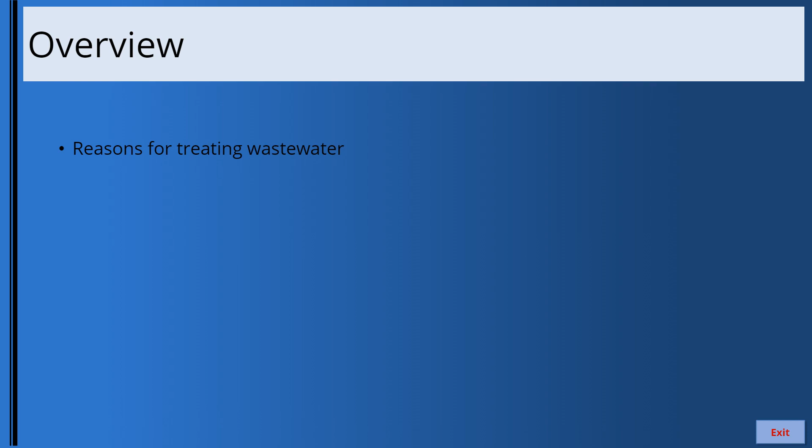So, as part of the introduction to wastewater treatment, I'm going to cover the reasons for treating wastewater, the NPDES program, which regulates wastewater treatment, and finally, it will include a discussion on the individual elements of wastewater management.

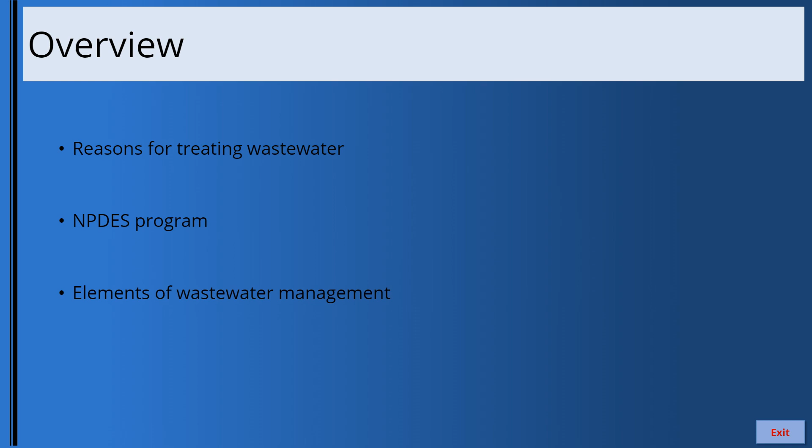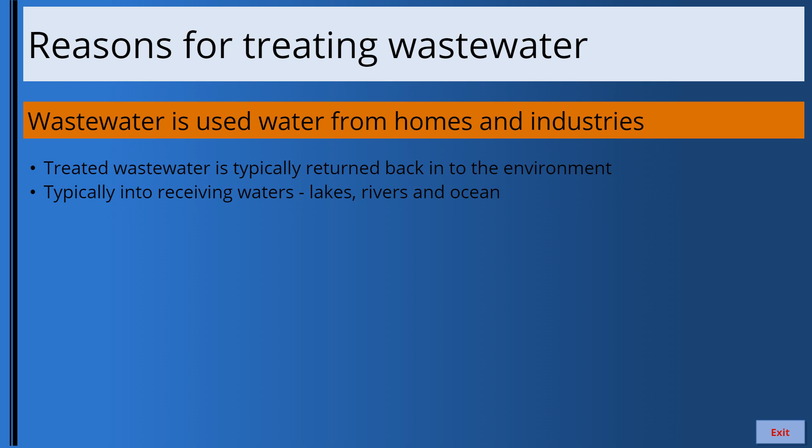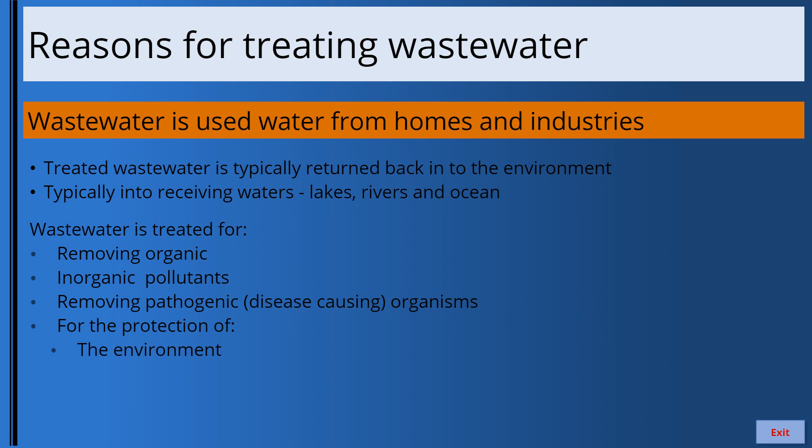So, now let's look at the reasons for treating wastewater. Wastewater is essentially used water from homes and industries. Typically, the wastewater is treated and returned back into the environment, into receiving waters such as lakes, rivers, and oceans. Primarily, wastewater is treated for removing organic pollutants, the inorganic pollutants, which include nutrients for plant growth such as nitrogen and phosphorus, and for removing pathogens, which are the disease-causing organisms. So, primarily, wastewater treatment is for the protection of the environment and human health.

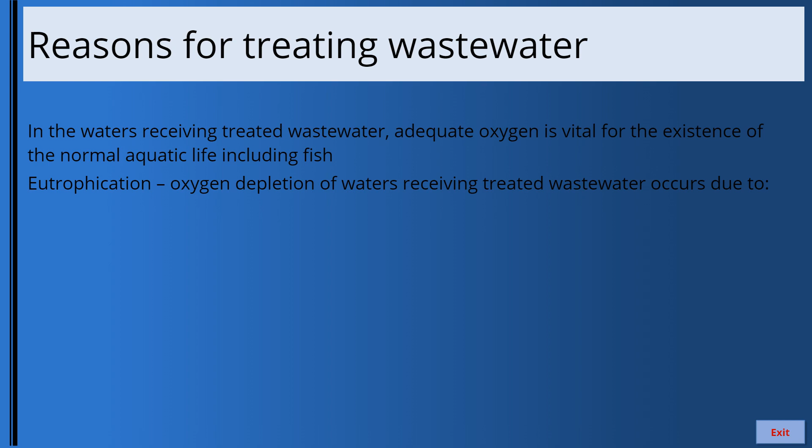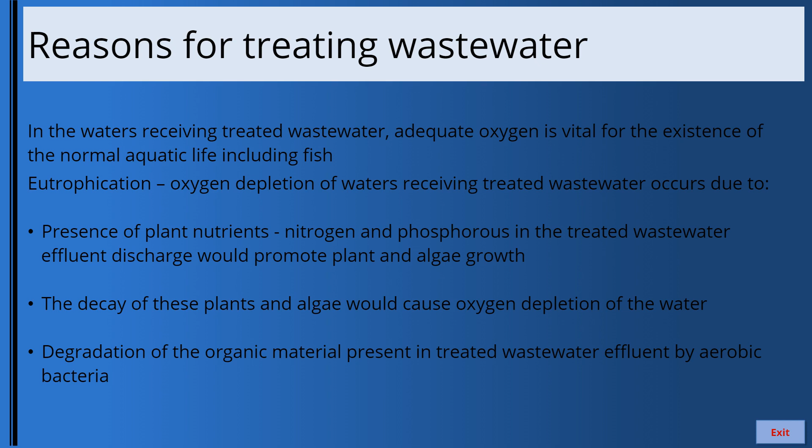So, in the receiving waters where the treated wastewater is discharged, adequate oxygen needs to be present and maintained to ensure the existence of its normal aquatic life, including fish. And if the wastewater discharged into that water body is not adequately treated, eutrophication, which is the oxygen depletion of the receiving waters, may occur, because plant nutrients, which include nitrogen and phosphorus, if present in the treated wastewater, would promote plant and algae growth. The decay of these plants and algae would cause the oxygen depletion. Additionally, if any residual organic material is present in the treated wastewater, it would be consumed by aerobic bacteria, resulting in the consumption of dissolved oxygen.

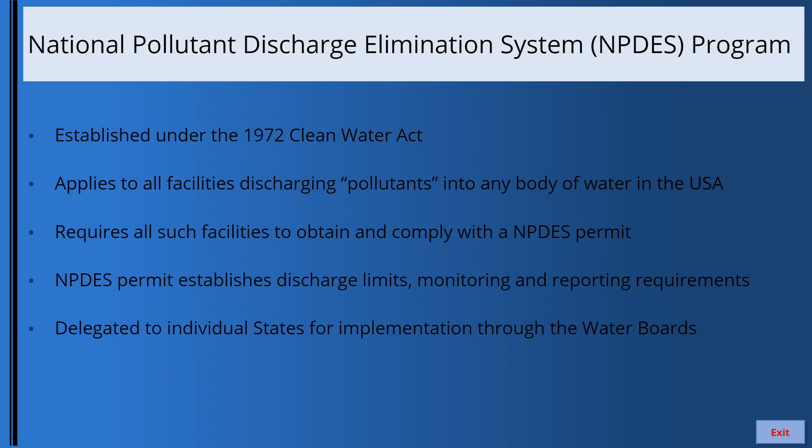The NPDES program, which is the National Pollutant Discharge Elimination System program, is the federal regulation which regulates wastewater treatment operations. NPDES was established under the 1972 Clean Water Act, and it applies to all sources that discharge pollutants into the waters of the United States. Primarily, the NPDES requires all facilities that discharge pollutants into any body of water to obtain and comply with the NPDES permit. And the NPDES permit is the document which establishes the discharge limits and the monitoring and reporting requirements for each entity that treats wastewater. The permitting and enforcement responsibilities of the NPDES permit are delegated by the EPA to individual states for implementation through their water boards.

NPDES implementation hierarchy is as follows. The EPA was granted the overarching responsibility to implement and monitor the NPDES program by the 1972 Clean Water Act. And the EPA has delegated its responsibility for NPDES implementation oversight to the state EPAs. So in California, it is the California EPA which has the responsibility for the NPDES program, and the California EPA subsequently delegates that responsibility to the State Water Resources Control Board, and the State Water Resources Control Board delegates its responsibility to the Regional Water Quality Control Boards. So there are in all 9 regional water quality control boards. So for the Orange County Inland Empire area, it is RWQCB Region 8, or the Santa Ana Regional Water Quality Control Board, that runs the NPDES program.

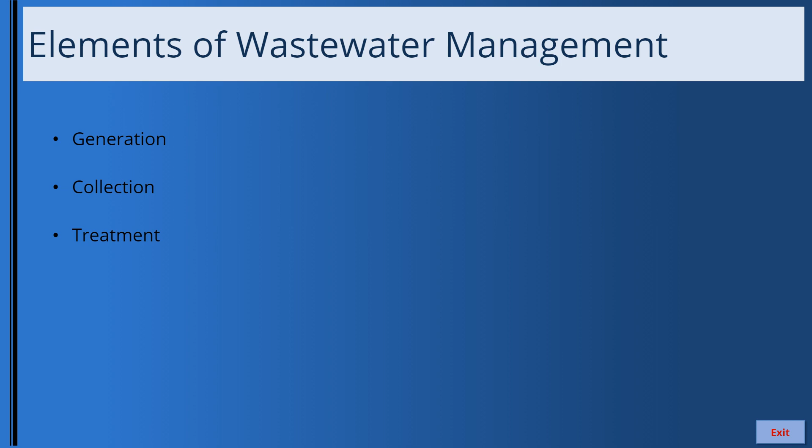So now let's talk about the elements of wastewater management. The first element is the generation or creation of the wastewater. The second element is collection. This deals with the gathering and transportation of the wastewater from the generation sources to the wastewater treatment plant. The third element is the treatment process by which the wastewater is treated, followed by the final element, which is basically the disposal or reuse of the treated wastewater.

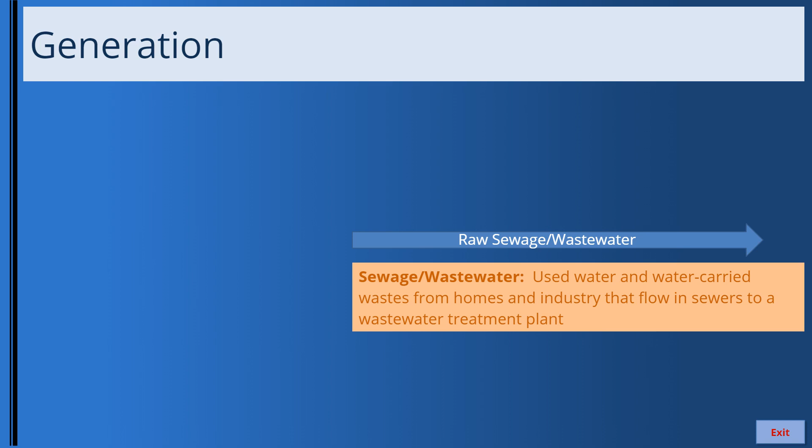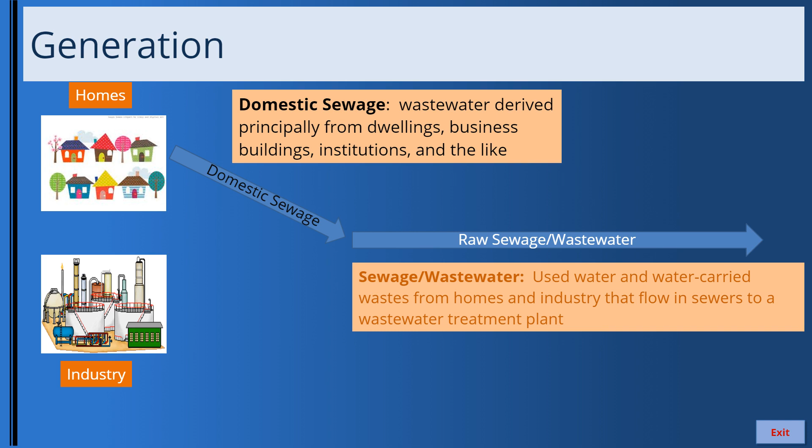So now let's talk about generation of raw sewage or wastewater. Wastewater is used water and water-carried waste from homes and industry that flows through the sewers to a wastewater treatment plant. The wastewater can originate from homes, and this is the domestic sewage, the wastewater derived primarily from dwellings, business buildings, institutions, etc. Another source of wastewater is the liquid waste from industry, which is the industrial sewage. Industry-derived sewage, by virtue of its origin, could potentially be of higher strength, which is a higher level of pollutant concentrations compared to domestic sewage.

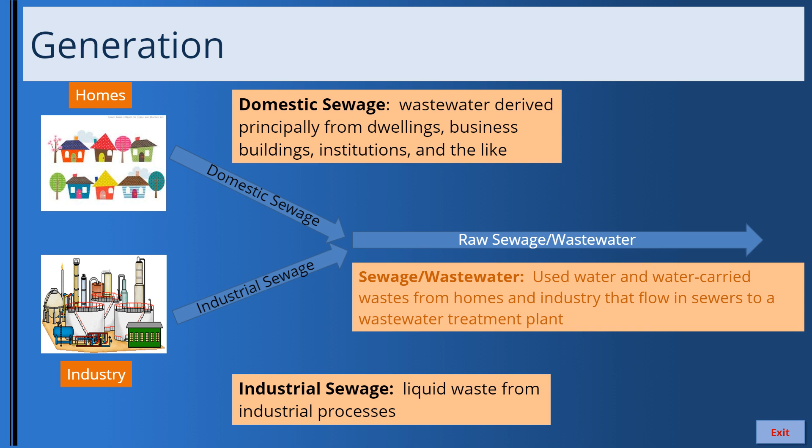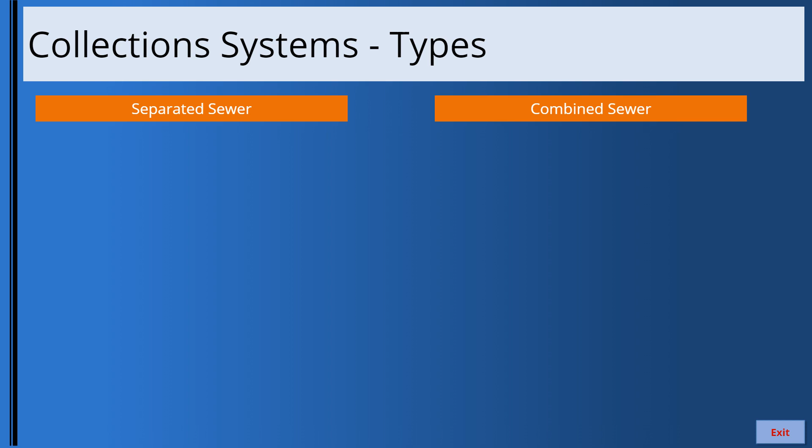So the collection systems can be classified into two types. The first is the separated sewer, and the second is the combined sewer. In a separated sewer, the stormwater from surface runoffs and roof drains are collected and transported to local receiving waters for surface water discharge. Here in the system, the used wastewater generated from homes and industries, including washing, waste, bathrooms, are collected in separate pipes, and these pipes convey the wastewater to the treatment plant.

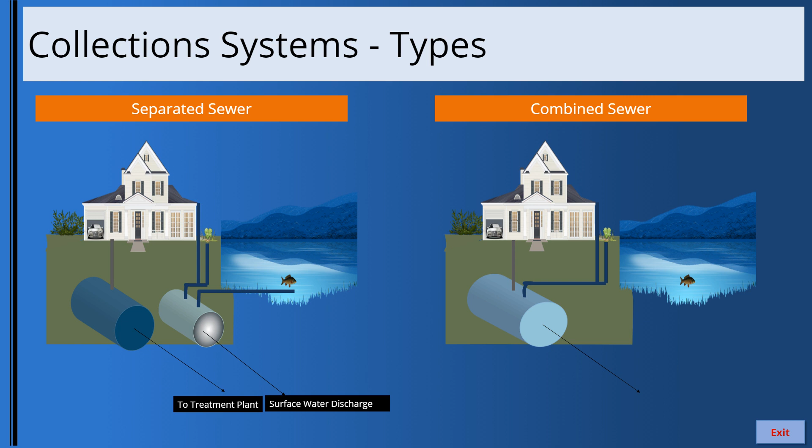In the combined sewer, you basically have the storm water and the wastewater essentially combined in a common pipe and transported to the treatment plant for treatment. In summary, in the separated system, the stormwater and wastewater are transported independently for ultimate disposal, whereas in the combined sewer, you have the commingling of the storm and wastewater, and this combined is transported to the treatment plant.

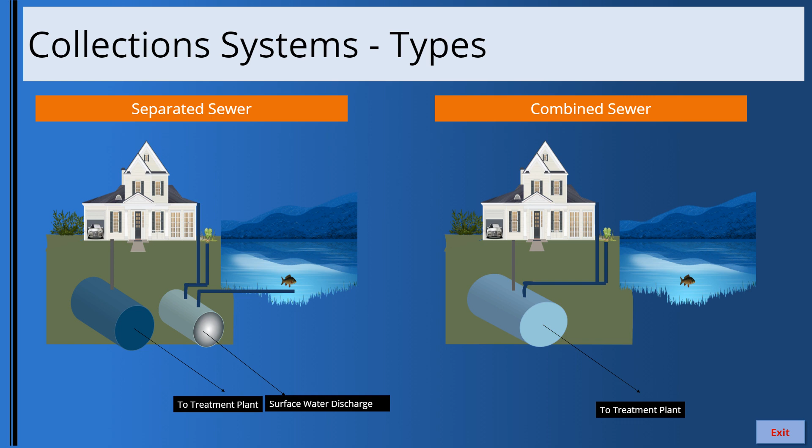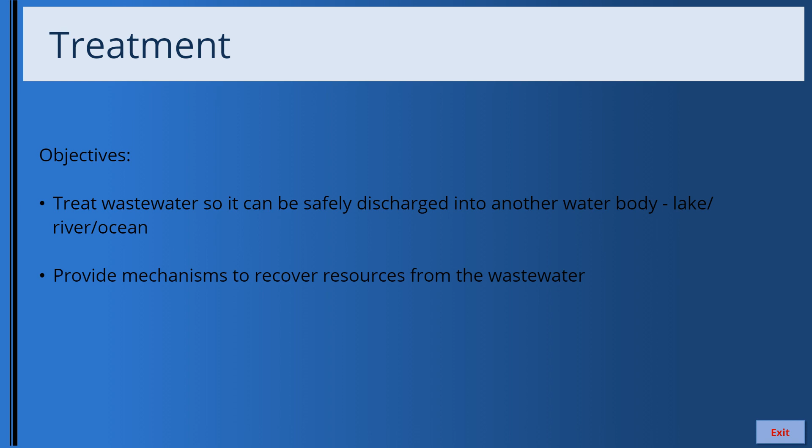So now let's look at treatment. As we have stated before, the objective of treatment is so that we could safely discharge the treated wastewater into a water body. Additionally, especially nowadays, treatment is expected to provide means to recover resources from the wastewater. So now let's see how wastewater is treated in a typical plant.

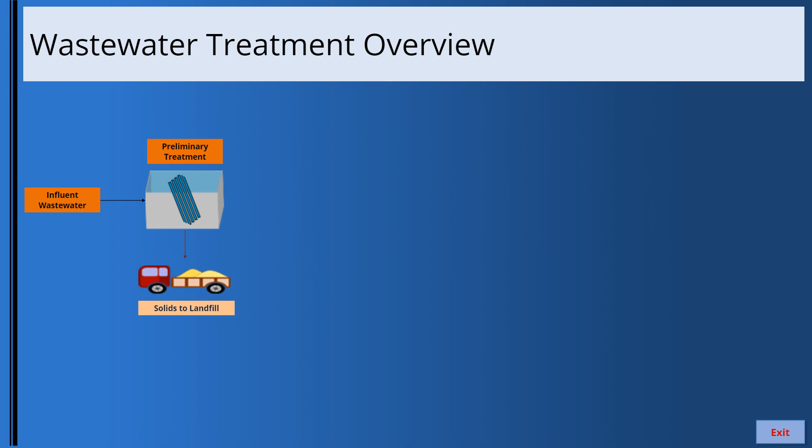The influent wastewater is first treated in the preliminary treatment. The solids that come out of the preliminary treatment are loaded into trucks and hauled off to a landfill. The water from the preliminary treatment goes to the primary treatment in the primary clarifiers or sedimentation basins. The primary treated water then flows into the secondary treatment. The activated sludge secondary treatment process is shown here. After the secondary treatment, the treated water is either discharged or treated further as part of the tertiary treatment.

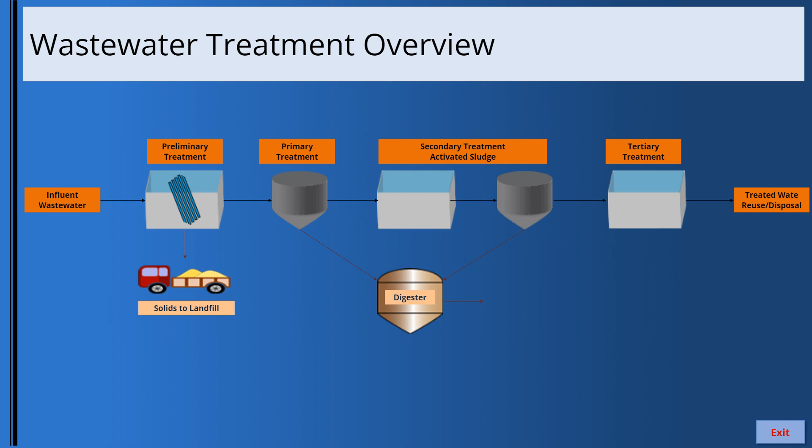These solids that are removed from the primary and secondary treatment processes need to be stabilized prior to disposal or reuse. Digestion, a commonly used solid stabilization method, is shown here. The stabilized solids which come from the digesters are dewatered and hauled offsite for reuse or disposal. The anaerobic digestion, if used, produces gas which contains methane and can be used as fuel.

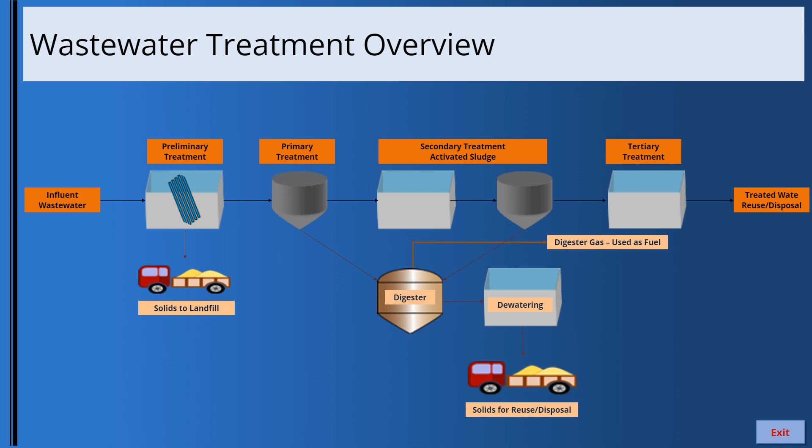And now the final element of wastewater management. The treated wastewater can be disposed by reintroducing it back to the environment, or it can be reused. The disposal methods include surface water discharge or the subsurface water discharge.

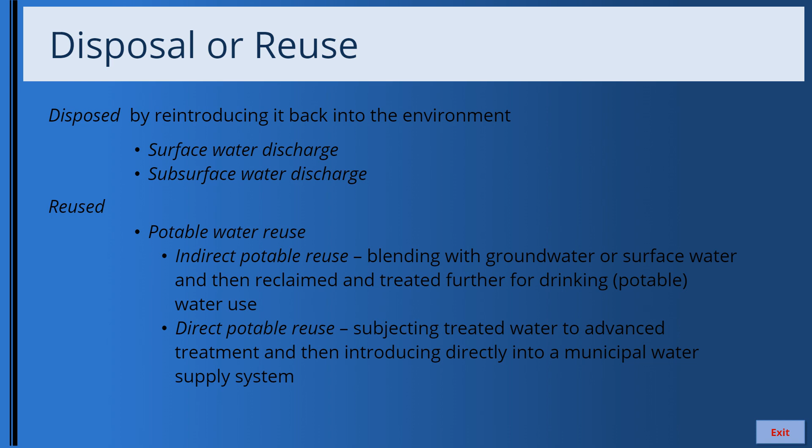The reuse options include potable water reuse, in which there is the indirect potable reuse, which involves blending with groundwater or surface water and then reclaiming it and treating it further for drinking or potable water use. The other is the direct potable reuse, where the treated wastewater is subject to advanced treatment and then introduced directly into the municipal water supply system. Reuse can also be done through water reclamation for irrigation or industrial use, and land application for beneficial reuse, primarily for agricultural purposes.

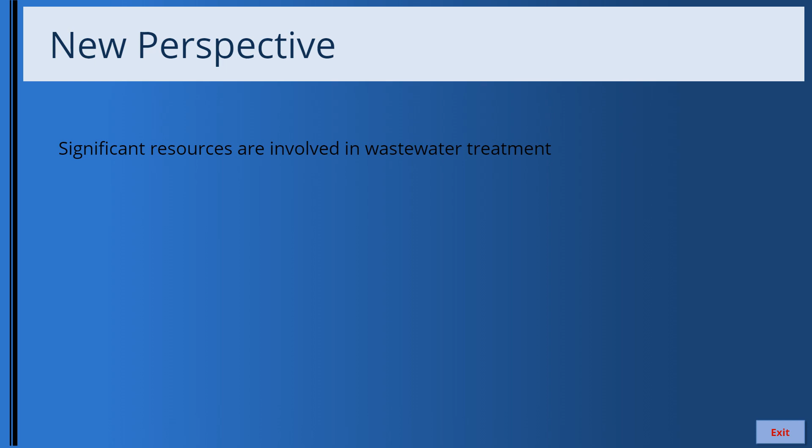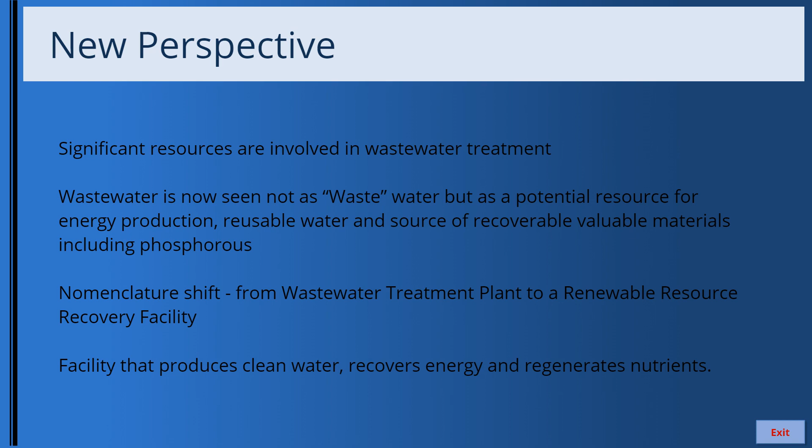So, a new perspective has emerged with respect to wastewater treatment, mainly because significant resources are involved as part of the wastewater treatment. Wastewater is now seen not as waste water, but as a resource for energy production, reusable water, and as a source of recoverable valuable materials, including phosphorus. Now, there is a nomenclature shift from wastewater treatment plant to a renewable resource recovery facility, which is a facility that produces clean water, recovers energy, and regenerates nutrients.